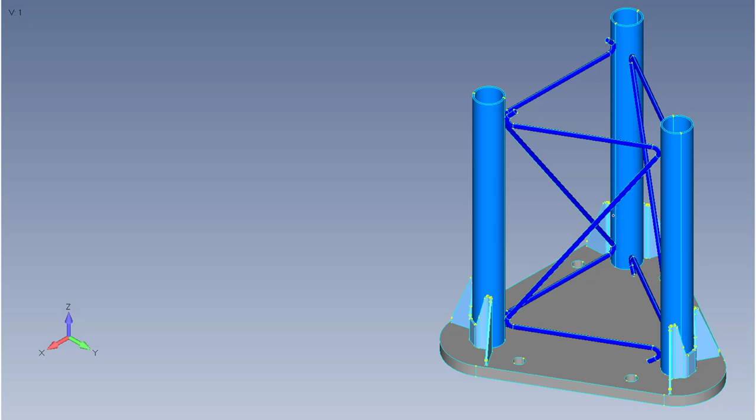In this video, I'm going to run through setting up a radio tower model.

I've already imported the geometry. It consists of a solid base plate, some gusset plates that are welded to vertical tubes, and then a solid circular bar cross member that goes to each of the tubes.

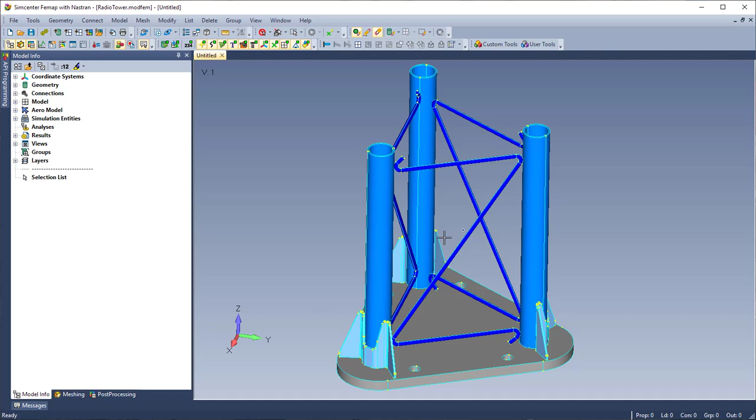I'm going to mesh what you see here with different techniques, and then copy the mesh in the positive Z direction to get the length that I need.

The first thing I'm going to do is use the meshing toolbox to add washers on the holes of the base plate where the anchor bolts will be. I'm going to align the splits of the washers tangentially to the curves on the outside of the solid here, and this is going to help when I mesh later.

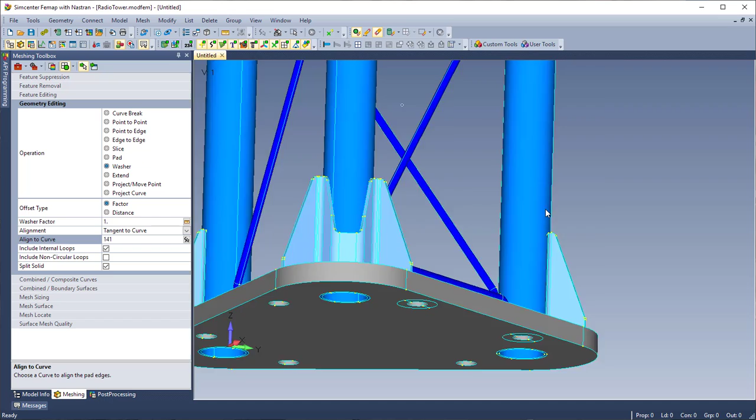I'll get a little better mesh quality, and also I can constrain around the holes more similar to what you would see in the real world environment.

As I finish up adding the washers here, you'll notice that I turned on the split solid in the meshing toolbox, and that'll project the splits all the way through the depth of the solid.

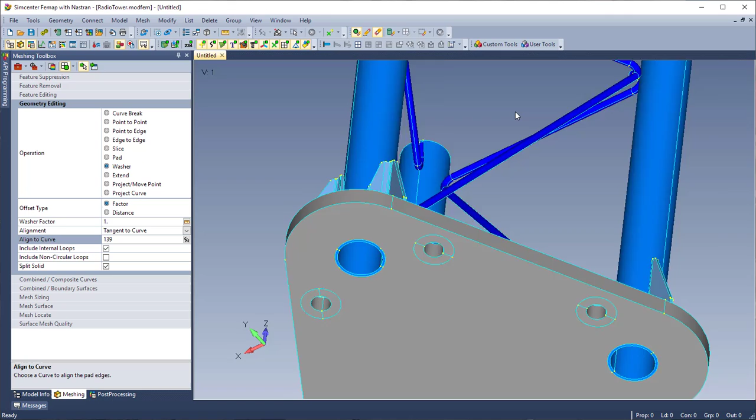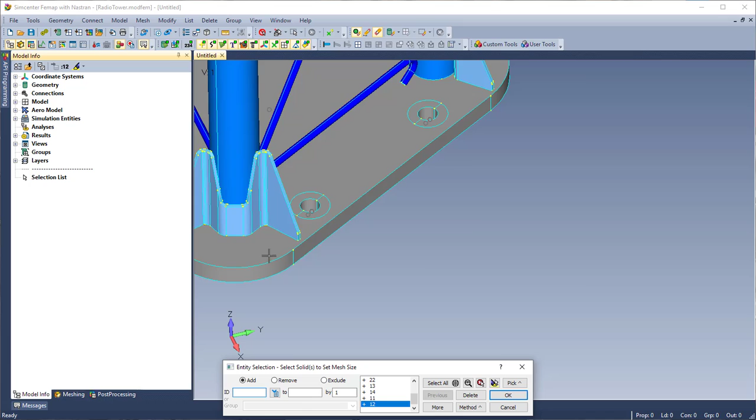So I'm going to go ahead and put a mesh size on the solid base plate, and select all the splits of the solid washers as well. That way, when I'm sizing this, the adjacent surfaces will be the same map, and I won't have to do a coincident node check later. The mesh will just be connected.

I want the base plate to be a hex mesh, so I'm going to check hex meshing and set the size to 0.5, with 2 elements through the thickness.

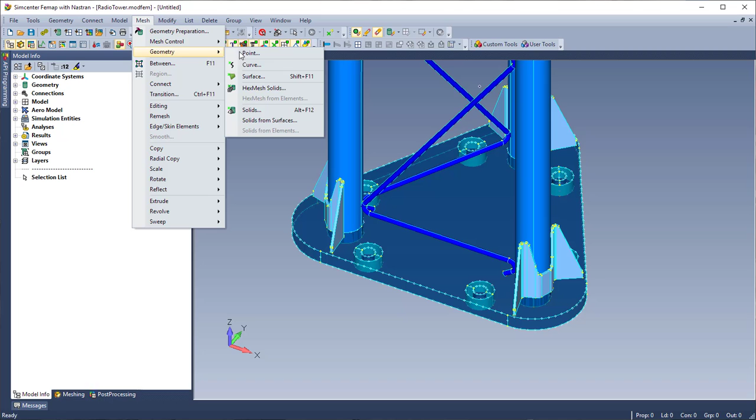Now I can go ahead and hex mesh my solid. I'm going to select previous, so I don't have to reselect all the splits of the solids. I selected steel for the material of the base plate, and I'm also going to use this for the gussets, the tubes, and the cross members for this example.

So I've meshed my base plate here, and I'm pretty content. The quality of the mesh looks pretty good, so I'm going to move on to the gusset plates.

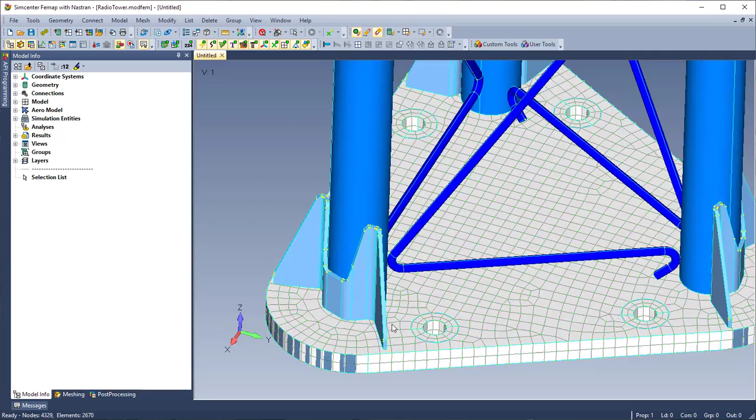I'm going to use the mid-surface automatic command, and in the entity selection dialog, I can use the on solid method, so I can just select the one solid and it'll grab all the surfaces attached to it. I'm going to check on combined tangent surfaces, which will stitch all the surfaces created from this mid-surface.

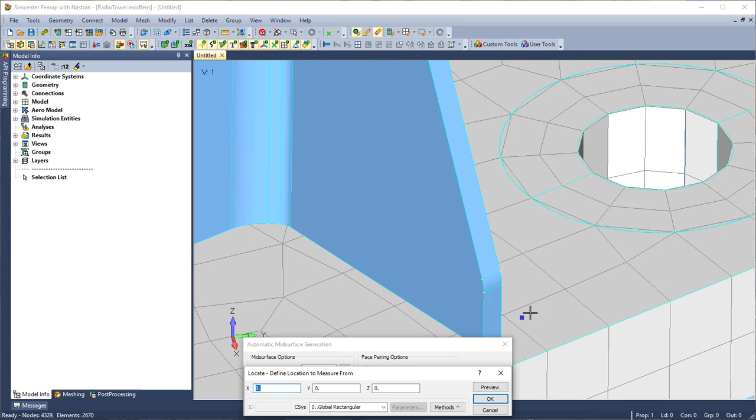Then I'm going to use the measuring tool, which will automatically propagate the target thickness. One thing I like to do is use the draw erase tool, which gives me the ability to hide or show selected entities. So I erased the solid plate there, and now I'm left with my mid-surface.

You'll notice that when I did the mid-surface automatic command, it generates these mid-surfaces into a group. So then I can use that - when I want to size my mesh now, I can use from group and add those surfaces very quickly without having to go in and select all the different surfaces.

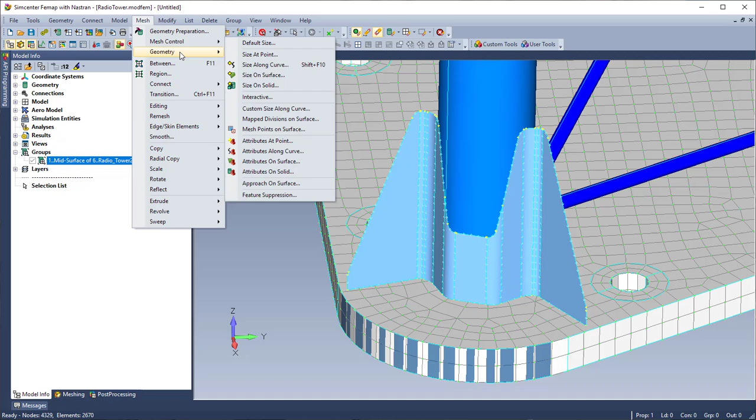So I'm going to size this to 0.2. And now I'm actually going to mesh the surfaces. I can just click previous now, and I'm going to create my property.

If you remember from the mid surface command, I used the measuring tool to get 0.15 of the solid, so I'm re-entering that to create my plate property.

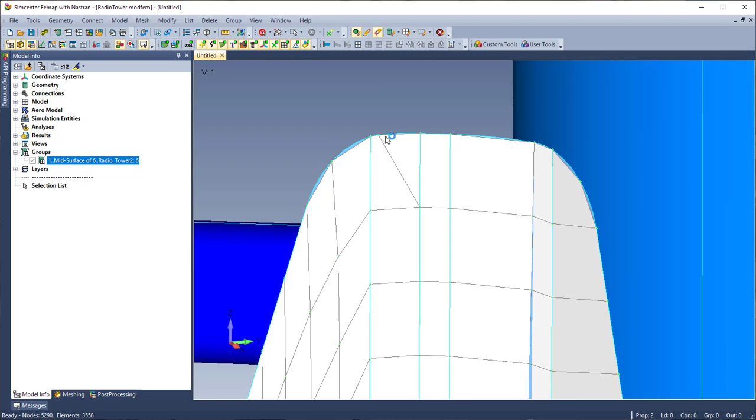Overall, the mesh looks pretty good, but I do see a couple of elements that look like their quality isn't that great. So I'm going to use the meshing toolbox with feature removal and remove a couple of these miscellaneous points.

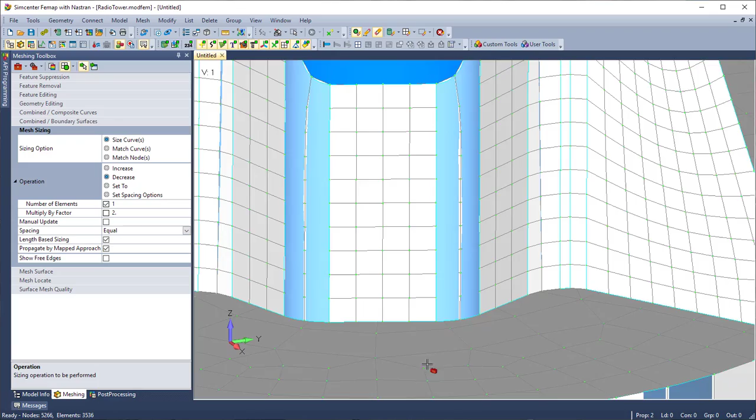I'm going to remove the 2 extra points on the top curve here, and that's actually going to create an uneven mesh size between the top and bottom curve. So I'm going to use the mesh sizing to decrease the size on the bottom curve, giving a more mapped mesh on that surface for better mesh quality.

So I meshed my base with solid elements and my gusset plate with shell elements, and now I'm going to create a glued contact property to mimic them being welded together.

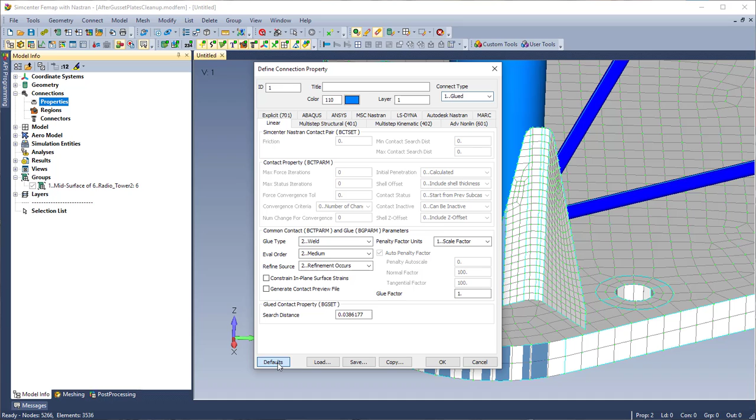When I create my contact property, I'm going to click the linear tab and set the contact type to glued, and just use the defaults.

So I'm going to create my first connection region, and I'm going to title this one base plate. And I can use the surfaces to go and grab the top surface of the base plate.

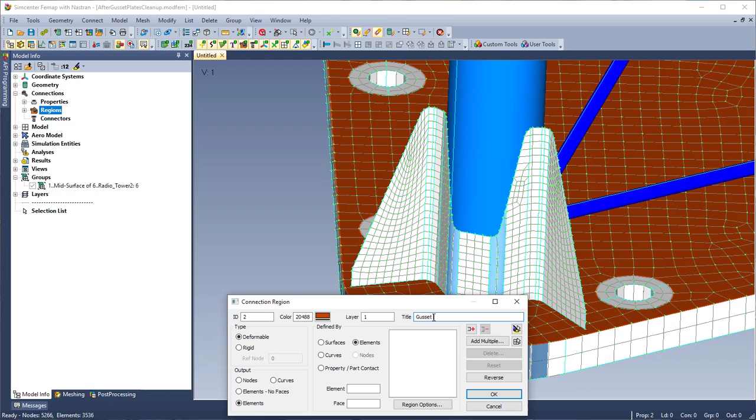With auto repeat on, now I can create the connection region for the gusset plate. I'm going to use elements, and I'll title this gusset plate, then hit add multiple.

I'm going to select one of the edges at the bottom of the gusset plate. With the tolerance set to 20, it doesn't grab all those, so I'm going to bump it up to 40, and now it grabs the whole edge.

Now that I have both regions created, all I have to do is create my connector. I'm going to select the property that I made, and the base plate as the master, and the gusset plate as the slave.

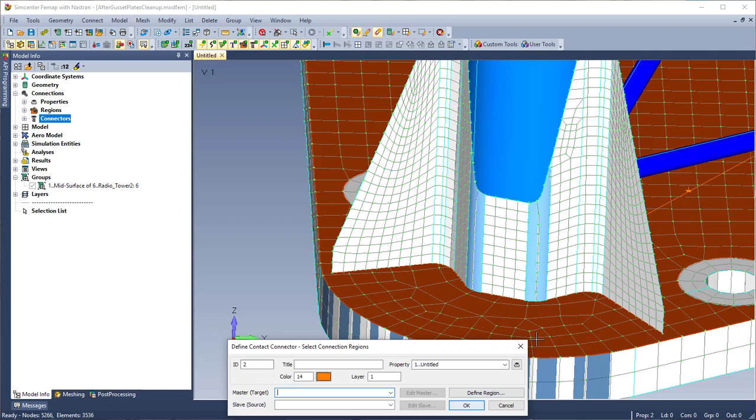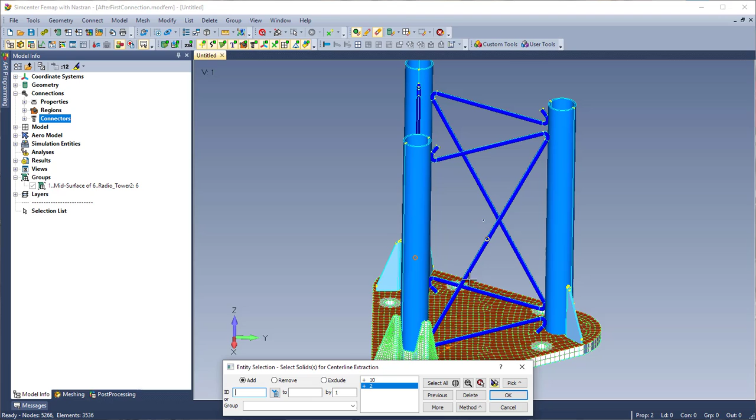The next step is prepping to mesh the vertical tubes and the cross members, and I'm going to mesh both of these with beam elements. Since I'm starting from solids here, I'm going to use the curve centerline command, which will let me select solids and automatically create a center line, associate a material, and create the corresponding property with the cross section from each solid selected.

So I can hide the solids, and you'll see that there's a center line created, and then I can expand the model info tree to show the properties that have been created.

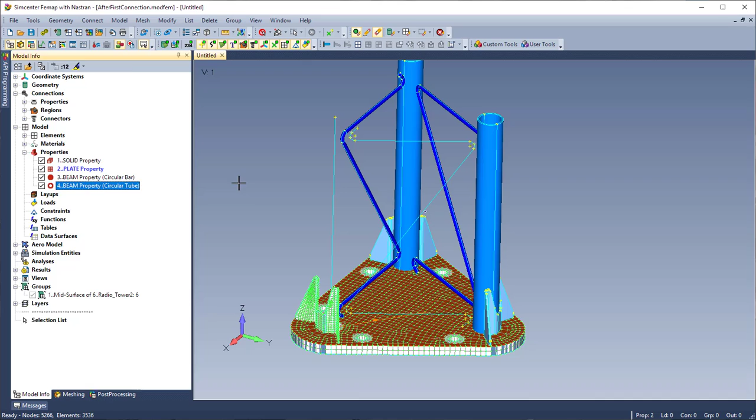I'm going to go ahead and mesh the vertical tube, starting by sizing it. I'm going to use an element size of 0.625, and then when I mesh this, I can use the meshing attributes associated with it from the curve centerline command.

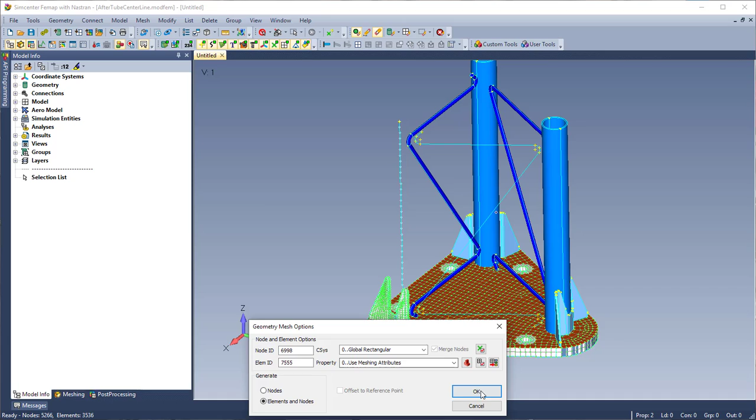I'm going to turn on element thicknesses to get a good visualization of what's going on here. You can see, in the real case, it would be welded along the seams here, the tube to the gusset plate.

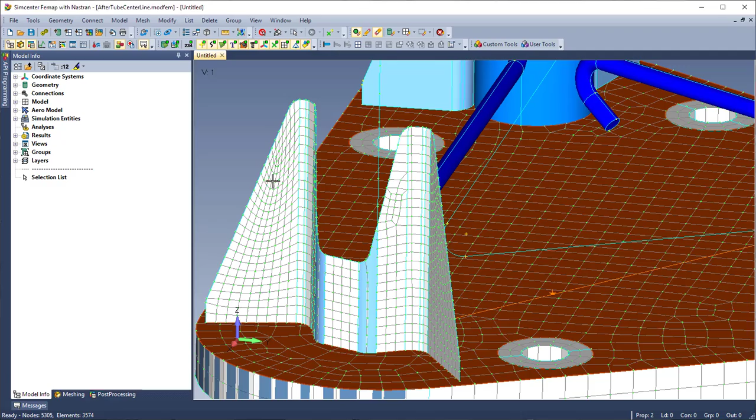So I'm going to turn off thicknesses again, and what I'm going to do is basically connect this using some rigid elements. I'll use mesh connect closest link.

In the selection dialog, to select nodes to generate from, I'm going to use the on curves method and select the curves that'll model the seam of where it's going to be welded to the tube.

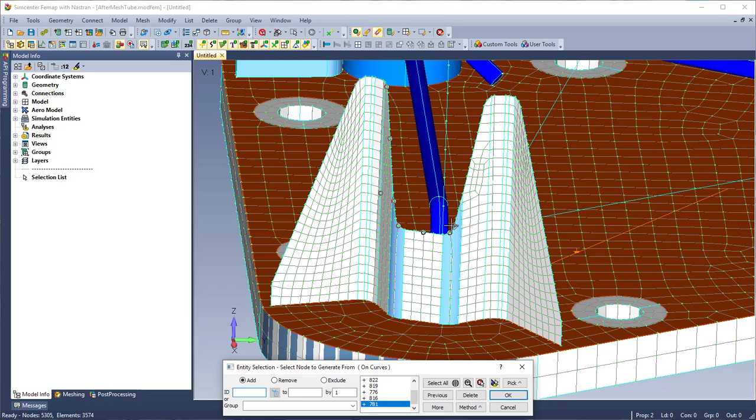And in the generate to field, I'm just going to select a couple of the nodes along the vertical tube in the area of where the weld would be.

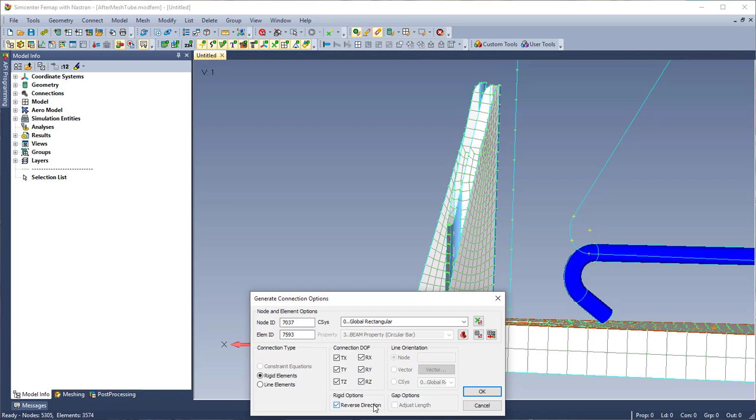I'm going to change this to the rigid element as the connection type and select all degrees of freedom. I'm also going to reverse the direction, because I want the dependent node to be on the gusset plate. So now my vertical tube is connected to the gusset plate.

Again, it's just kind of modeling the weld here. You'll notice that I only meshed one of the gusset plates and one of the vertical tubes.

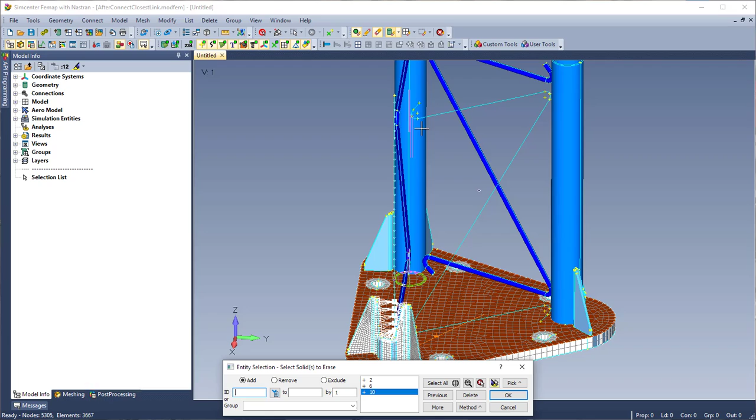That's because I'm going to do a rotation copy, which will save me some time on repeating steps I've already done, like meshing the surfaces and curves, and connecting the two with rigid elements. So I'm going to use mesh rotate element.

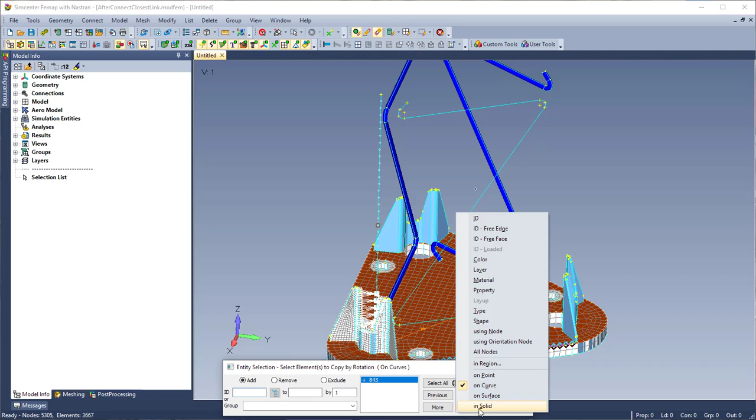In the entity selection, I'm going to use the method on surface to select my mid surfaces in that group. Then I'll switch over to on curve and grab my vertical tube, then switch to ID and use the pick method to add connected elements, grabbing the rigid elements I created for the connection.

Now that I can see I had all the elements selected that I needed, I can follow through with the rotation command.

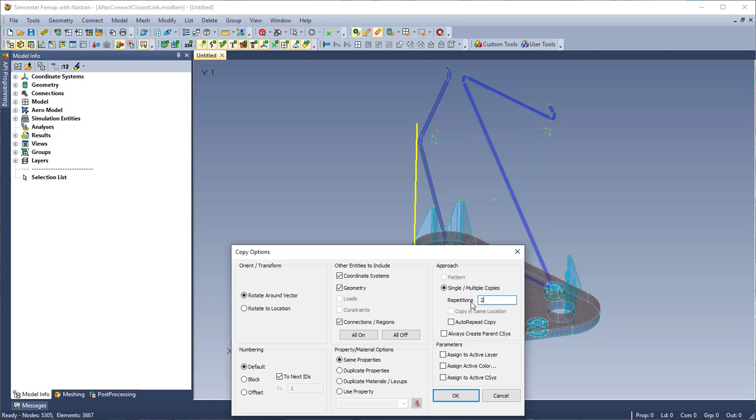I'm going to make sure I have geometry and connections and regions turned on, and other entities to include. Then in repetitions, I'm going to change that to 2. Now when I'm prompted to select my rotation axis, I'm going to use a little trick here.

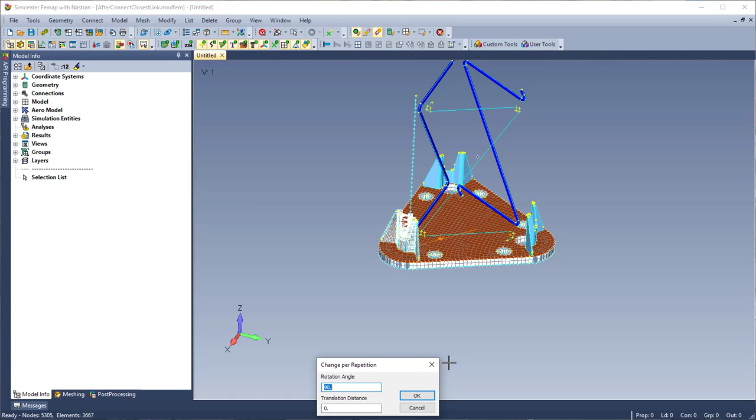I'm going to hit Control Z, and that's going to bring up a selection to pick a point. I'll use the center of gravity of surface method to select the top surface, then repeat that to select the bottom surface, so I have a rotation axis in the center of the base plate. I can change my rotation angle to 120.

So I'm just going to erase the other 2 gusset plates, and you'll see that with the rotation copy I did, I'm left with both the surfaces and the mesh. Because I chose to include connection regions when I did the rotate copy, the 2 copied gusset plates actually already have connection regions on the edges.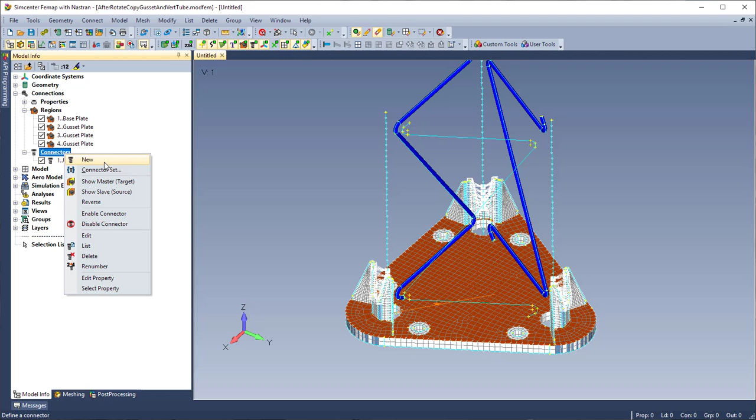So now I just need to go create the other 2 connectors between the gusset plate edges and the base plate. I'm going to go ahead and create those 2 real quick. Then using my model info tree, I'll go in here and highlight the connectors just to visualize that they're all there, and now I can move on to my next step.

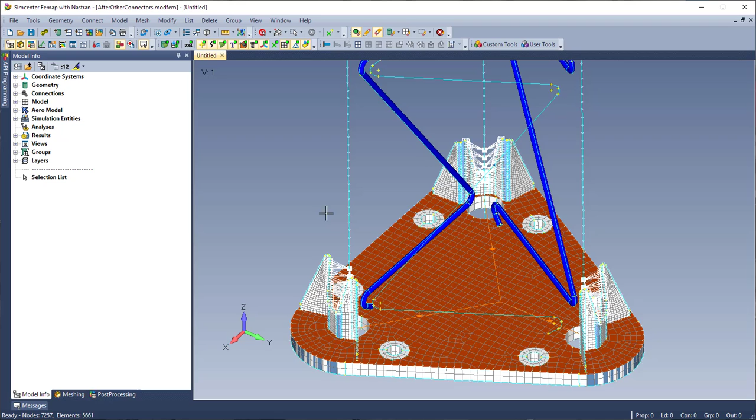I'm going to create a new group here, and what I'm going to do is group the curves of the cross member center line, so that when I go to mesh size this and mesh it, and also do another rotation copy, I can easily select these without having to select all the curves over and over again.

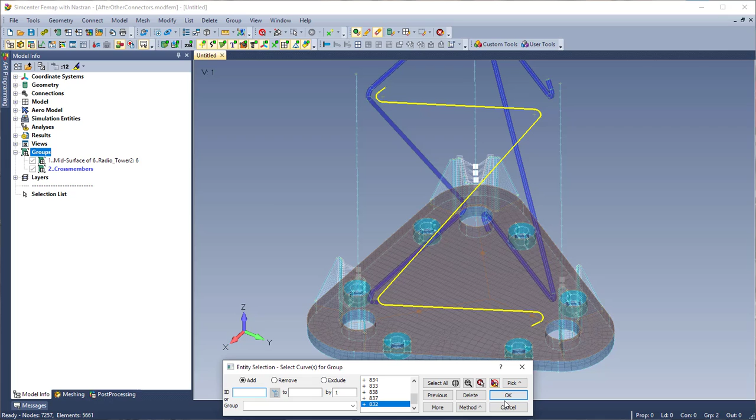So I'm going to go ahead and put a mesh size on the curves that make up the cross member. Again, these are the center lines. I'm going to use my group to add those curves, and use an element size of 1.

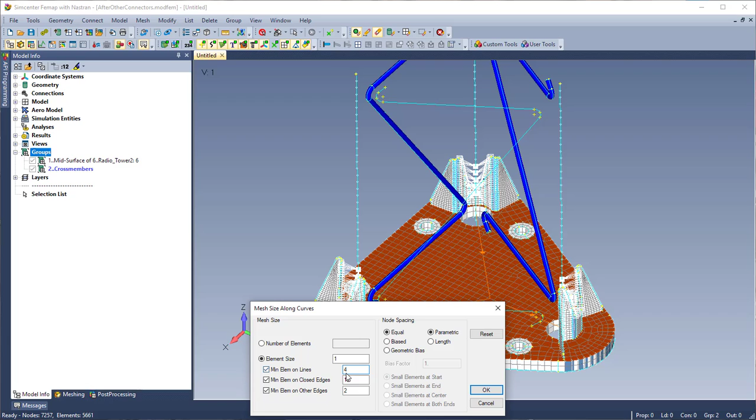And then I'm also going to set minimum elements on a line to be 4. That way on some of the curves or the bends there, I get a couple more elements than what I would have if I just selected 1, so it follows the shape more.

So now I can mesh these, and again, I can just use the meshing attributes that are associated with the curves from the curve center line command.

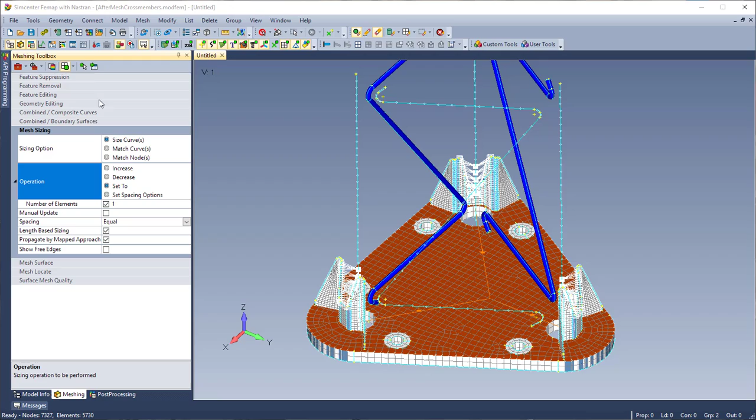One last thing I'm going to do is use the meshing toolbox to size down the end pieces of the cross member again. I set the minimum elements on a line to be 4, and I really want it only on the bends, not the smaller lines that make up the end pieces of the cross member, so I'm just going to set those to 1.

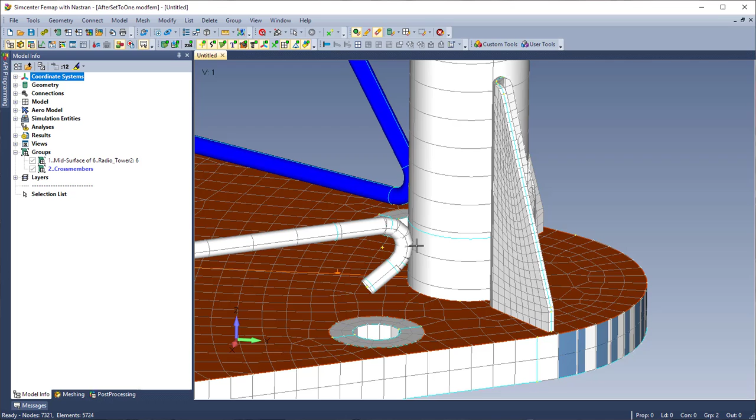So now that I have the cross member mesh, I'm going to go ahead and turn on thicknesses and cross section just to visualize where the cross member and the vertical tubes are lining up. Again, there would be a weld there.

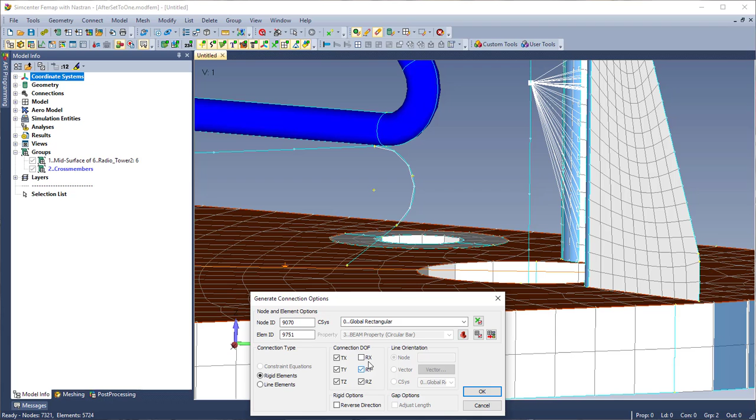So I'm going to repeat my steps with the mesh connect closest link. Again, I'm going to select a couple nodes on the bend of the cross member, and for the generate to, I'll select a node on the vertical tube and use rigid elements, select all degrees of freedom, and again reverse direction.

So I'm going to go ahead and continue on and actually repeat that step with the 3 other bends on the cross member. I'll skip ahead a little bit. And as you see now, I have it all connected to the vertical tubes, my cross member here.

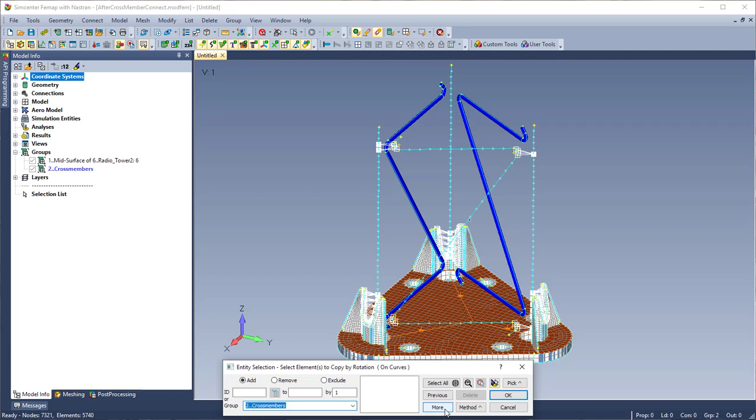Now I can actually do another rotate copy for this. I'm going to go ahead and use mesh, rotate element again. Then in the entity selection dialog, I'll use the on curve method and select my cross members group that I previously created. I'm going to highlight those, and you can see it grabs the elements on the cross members.

Now I'm going to switch over to ID so I can use the pick and add connected elements. That way it grabs the rigid elements that are connected to the vertical tubes as well. So again, I'm going to switch my repetitions to 2.

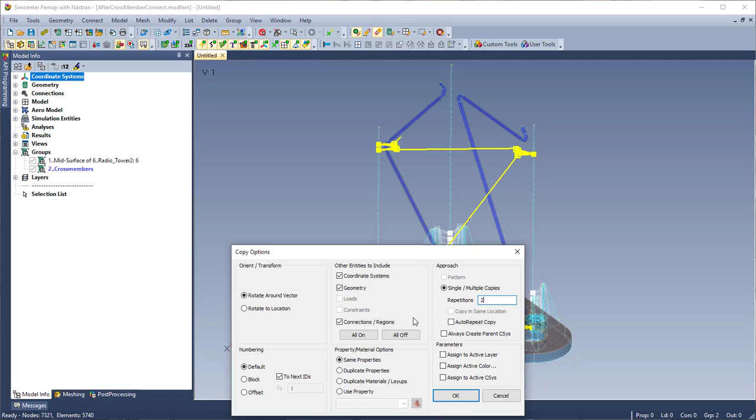And now I'm going to use my trick again, where I'm selecting the axis of rotation using Control Z, so I can select the CG of surface and select the top surface and the bottom surface of the base plate again, and change my rotation angle to 120.

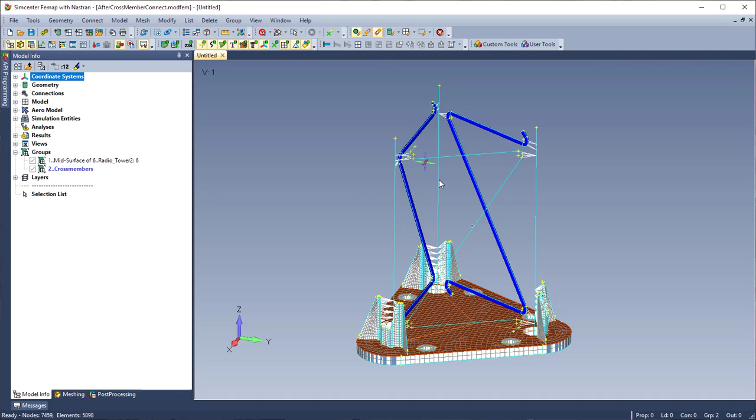And I'm going to go ahead and hide my solids from the other 2 cross members. I can see at this point, I pretty much have my mesh set up.

I'm going to turn off the mesh sizing on the curves here just for visualization purposes. Earlier in the video, I mentioned that I'd be copying the mesh in the positive Z direction just to get the height that I wanted.

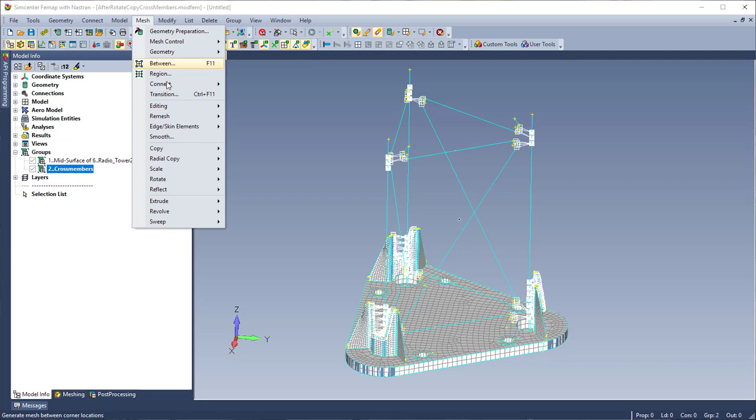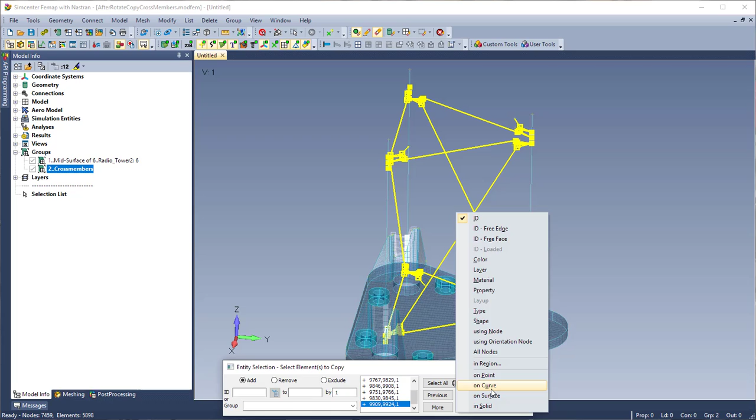So I'm going to use mesh copy element. The first thing I'm going to select is using on curves, and select my cross members. Then switch over to ID, and again I'm going to use add connected elements, and that way I grab the rigid elements connecting to the vertical tubes. I'm going to switch back over to on curves and get my vertical tubes. I did it in this order so that when I did the add connected elements, I wouldn't get the rigids that were connecting the gusset plates to the vertical tubes.

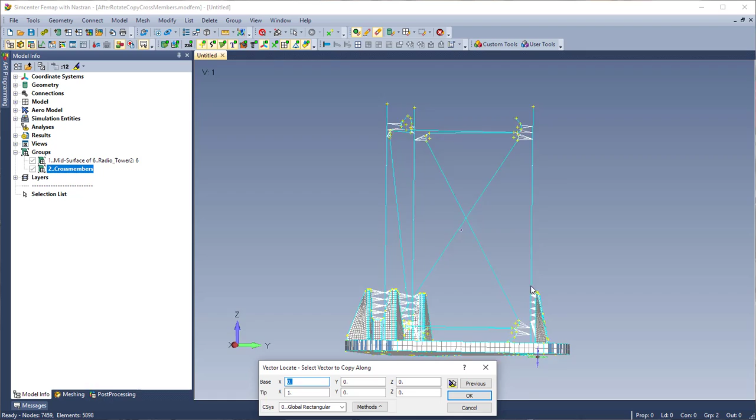I'm going to copy this up 19 times. I'm just going to use along vector, and I'm going to select the base of the vertical tube and go up to the top of the vertical tube, and that way my mesh will align.

So I've done my copy, and I've got my tower to the length I need it to be.

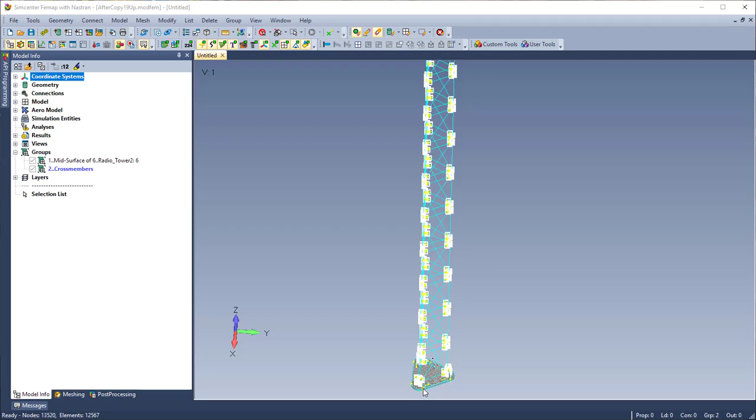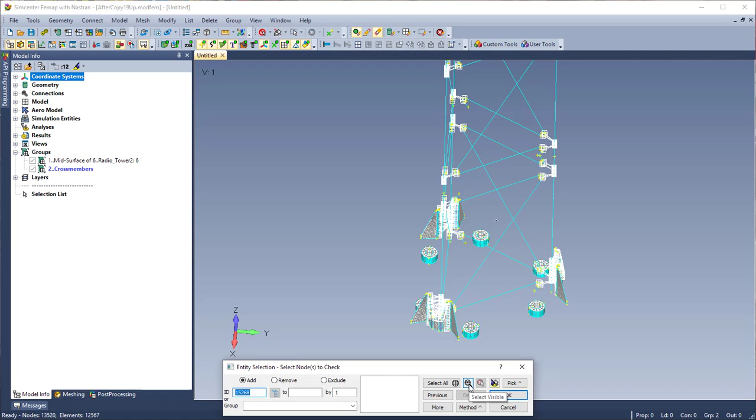When I did my vertical copy of my mesh, and even the rotation copy of the cross members, I'm going to have some overlapping nodes, and I want to merge those so everything's connected. So what I'm going to do is hide the base plate solid and, with it, the elements, and that way when I do my tools check coincident nodes, in the node selection dialog, I can do a select visible, so I'm not going to merge any nodes that may have been coincident between the gusset plate and the base plate.

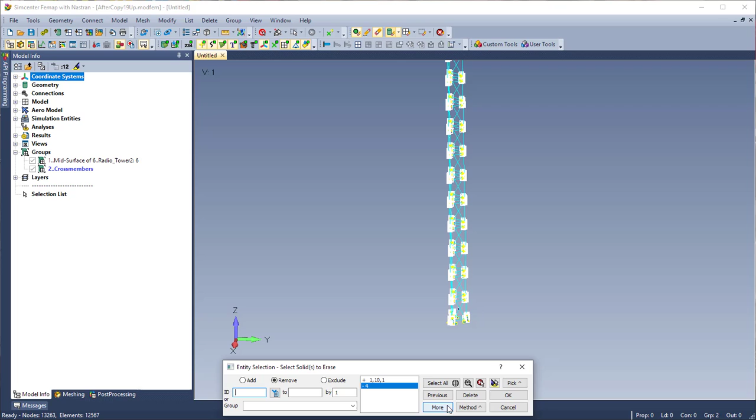You probably noticed a couple rigid elements connected from the cross members to the vertical tubes, and also the vertical tubes that were copied straight up had some coincident nodes. So I just went back into my erase selection, and I'm removing solid ID 4, which is my base plate, so I can see that again.

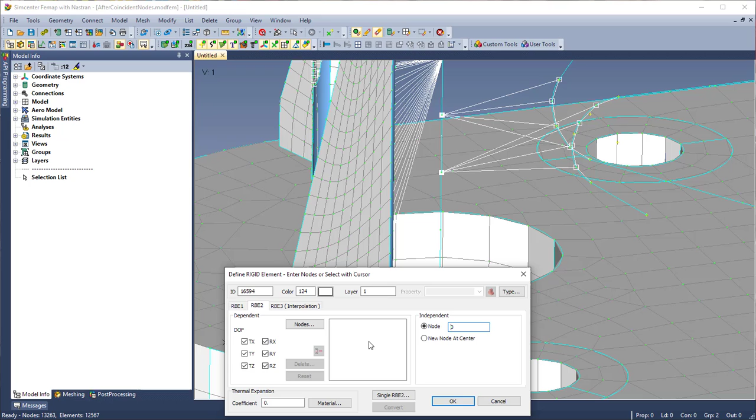So the last thing I'm going to do here is create a rigid connection between the vertical tube and the hole of the base plate where the tube would slot into, kind of mimicking a weld between those two. I'm going to create a rigid element, an RBE2, and grab the nodes on the curves of the hole for the dependent, and as the independent node I'll select one of the nodes on the vertical tube. I'm going to repeat those steps for the other two tubes.

So I have my model completely meshed now. I'm going to go ahead and set up my normal modes analysis.

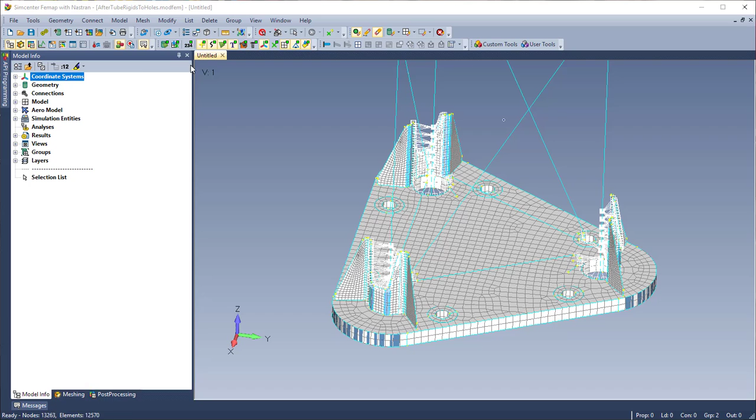I'm going to create a constraint on the surfaces of the washers that I created earlier. It's going to prompt me to create a new constraint set, we'll call that anchor bolts. I'm going to go ahead and select the top surfaces of the washers and the inner ones. I'll continue on with this, but I'll skip ahead a little bit.

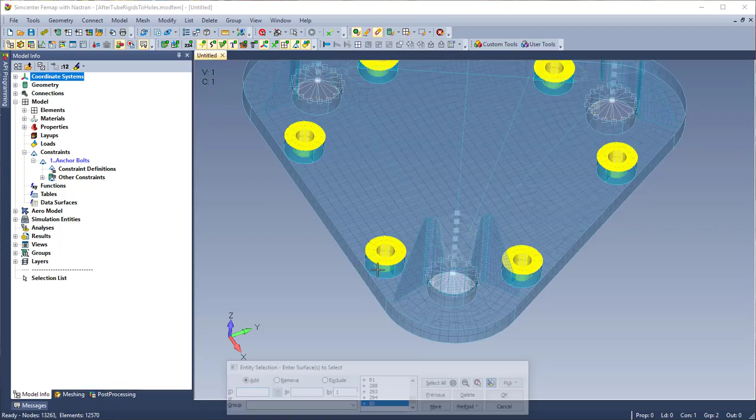So I'm going to highlight here, I have all my washers selected. And then I'm just going to use a pinned, no translation constraint.

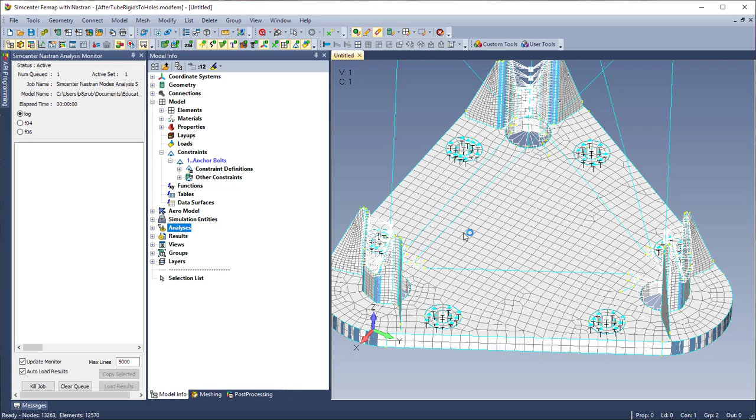Now I can go through the model info tree and just right click on analysis and hit manage. I'm going to create a normal modes analysis. Again, because my constraint set is active, it automatically grabs that. I can kick this off, and fairly quickly I have my results read in.

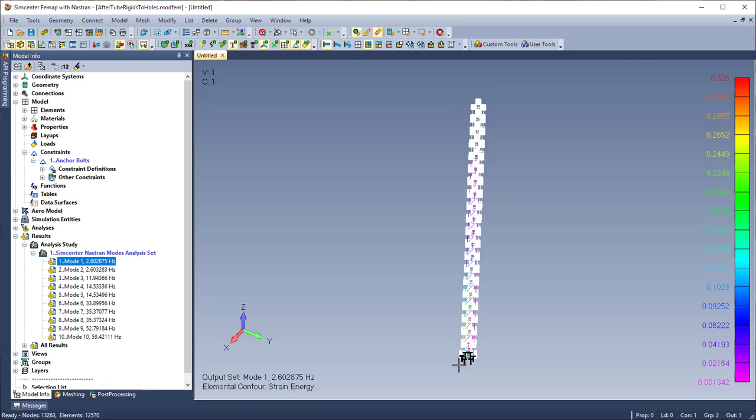So I'm going to run through the mode shapes real quick. I'm going to turn on my contours, turn off the geometry, and zoom out a bit, and you can see all the symbols from the rigid elements. So I'm going to go into the view options and turn those off. The hotkey is F6. Then I'm going to go into element rigid and turn off draw symbols.

And now I can show the animation of the different mode shapes.

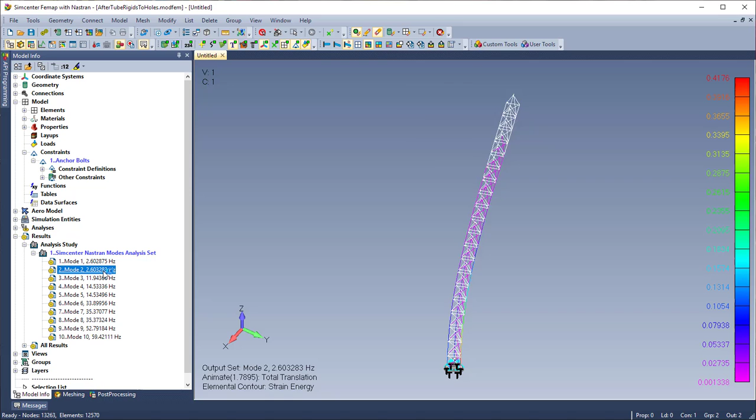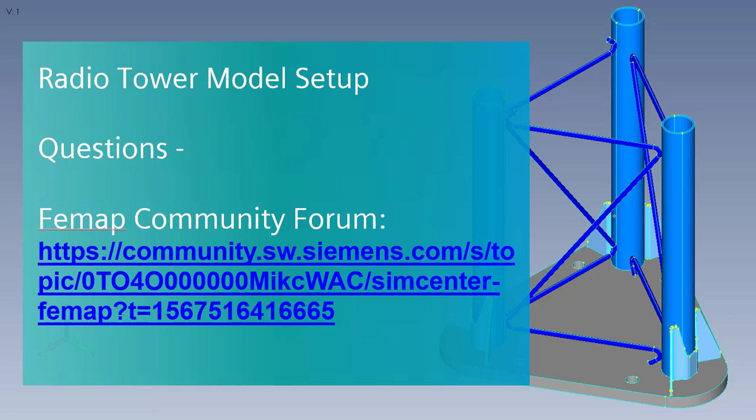Thank you for watching this video on how to set up a radio tower model in FEMAP. I hope you found it insightful, and if you have any questions, please direct them to the FEMAP community forum with the link provided here.